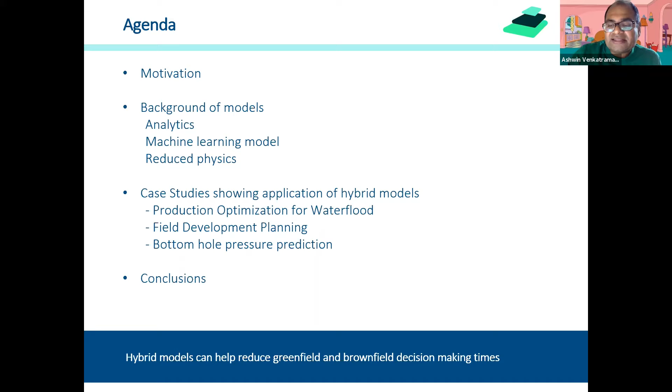And one central point that I would like to drive through the course of this talk is how the whole idea of hybrid models are formed, and how they can really be our ally, especially when it comes to trying to overcome the individual limitations associated with each of those models. All right, so let's take a step back, and for those of us who've been around long enough, do you remember how perhaps a person like Bob would be planning vacation in the 1980s?

I understand we have a mix of folks here. So for those of you who are old enough, let's say that Bob is trying to take a vacation to New York City from Austin.

These are the steps that he would typically do back then. He would start with the yellow pages, search for hotels in NYC, narrow down to a zip code, possibly start calling each hotel, check for availability, evaluate the best alternative amongst those that are available, and continue this process until he ends up reserving a specific room for himself.

Now, it's quite surprising that when you talk about Bob trying to run a reservoir simulation today, which is primarily the decision-making tool in our oil and gas industry, there are actually a lot of parallels with those steps.

So you start with learning the manual. There are umpteen keywords and framework that one needs to figure out. Perhaps by that time, you're already lost. You probably have to also select an appropriate physical model. Are you talking about a black oil simulation, or are you talking about a compositional simulation? Is it a gas condensate reservoir that you're trying to model?

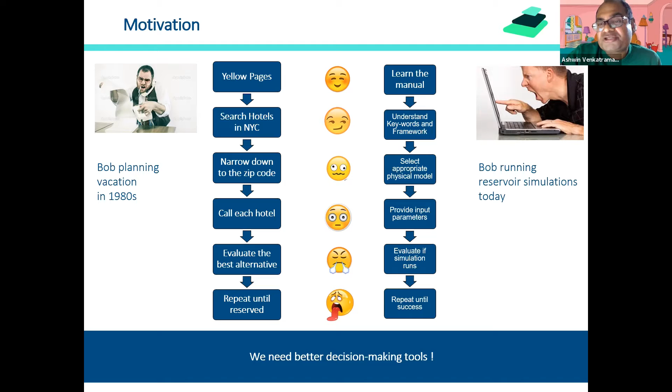So this was, I was Bob running reservoir simulations not too far back when I was with Shell, and that was really the inspiration behind starting Resermine. The whole idea that we definitely needed much better decision-making tools, which primarily can help guide decisions.

Now, that's not to say that there haven't been other tools, but I'm just trying to summarize a list of different models that are typically available when it comes to reservoir surveillance and management, along with some challenges associated with each of these different models.

So when you talk about analytics, what you're really looking at is some kind of statistical method, some cross correlations perhaps, or trying to derive some relationships where you're running them only on the data you observe, like temperature data or pressure data. And there, of course, the challenge is to identify which data set to run these relationships on.

You can talk about machine learning models, and this is something we are embracing in our industry. These typically use supervised learning, so I shall focus more on supervised learning, perhaps touch upon random forest and neural network, where you find a lot more successful applications. These are new methods, and I would want to believe that we as a community are still learning how to integrate them with existing workflows. Hopefully I'll present a couple of examples of how some of these can be incorporated.

There's another category of models called reduced physics or reduced order models. They've been around even before we started embracing simulation in a big way. These try to describe perhaps the first order physics using simplistic equations, governing background equations that might be ordinary differential equations, which means you have a neat and simplified analytical solution. So they've been around for a long time, and of course these are accepted academic techniques. People understand that they indeed help capture a lot of these first order physics.

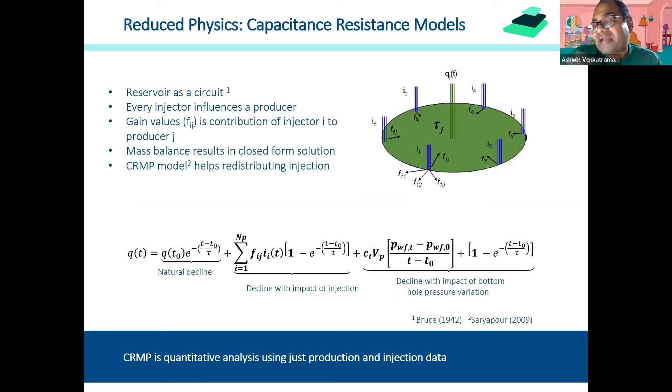Once you know these Fijs, you can go back and recast these equations to perhaps ask yourself, what should be my new injection so that I can maximize my oil production.

So I mentioned about multi-layered reservoir where you have commingled production. What we do here is essentially separate out multiple layers, which means you're adding more variables. Well, it doesn't matter, because you can use some sophisticated algorithms around it. And of course, you add an additional constraint that the total production coming out from the sum of these producers has to be constant.

And of course, you can also adapt these to steam floods, where the variation you make is to recast those equations into a two-phase flow equation, and you also have a varying tau.

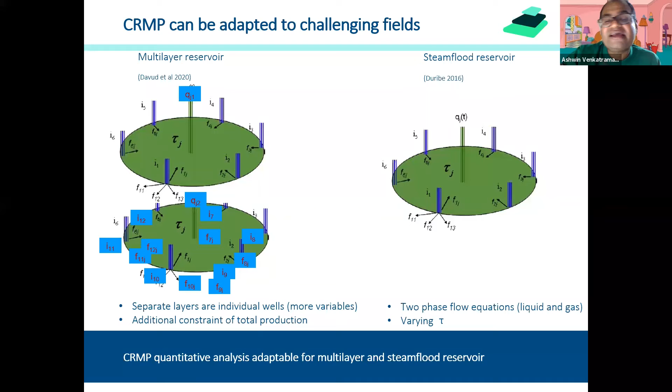So a lot of work has been done back in UT, and we've adapted and added multiple layers around that work. Essentially, this specific model can act as a quantitative analysis, because here you're talking about how much to inject from every injector.

Especially for multi-layer and steam floods, the other kind of reduced physics model we typically use is the fast march models. These rely on the pressure diffusion equation, using geological data and fluid properties to move from a permeability map to a diffusivity map, and time-of-flight calculations to determine drainage volumes around a specific location.

I will come back to some applications of these models. They're particularly relevant in field development planning, because depending on where you place the well, you can use these models to compute drainage area, which can be inputted into machine learning algorithms. Combined with reservoir simulation, they end up making much more predictive models compared to models trained on reservoir simulation alone.

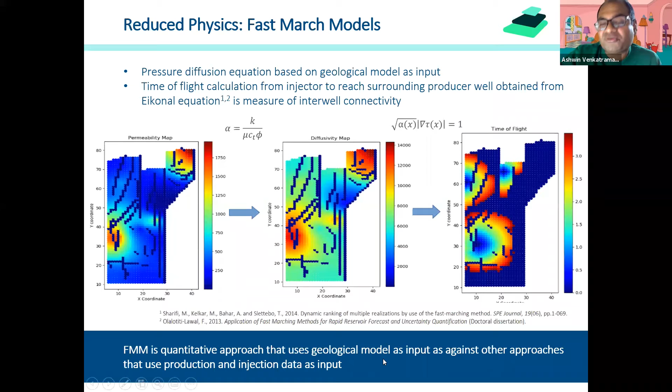So this is again a quantitative approach that uses a geological model as input, as against other approaches which typically use production and injection data as input. I just wanted to introduce some of these models, some background on how they're constructed, and some underlying equations.

So let's talk about some actual applications, especially mature field optimization. By mature field, I mean any field that has been under water flood or gas flood, where you have a lot more data in your system.

And when you have a lot more data from your reservoir, some of these methods are more powerful than a traditional reservoir simulation approach. So what you can do is essentially split into qualitative analysis and quantitative analysis.

On the qualitative side, we use analytics and machine learning, trying to broadly categorize wells into groups, identifying where your thief zones are. The kind of questions you answer with qualitative analysis include knowing which specific injector wells are effective.

On the other end of the spectrum, you can use these results and plug them back into the quantitative analysis, where you answer questions around how much injection is lost, and more importantly, which specific wells and how much water to inject in those specific reservoirs.

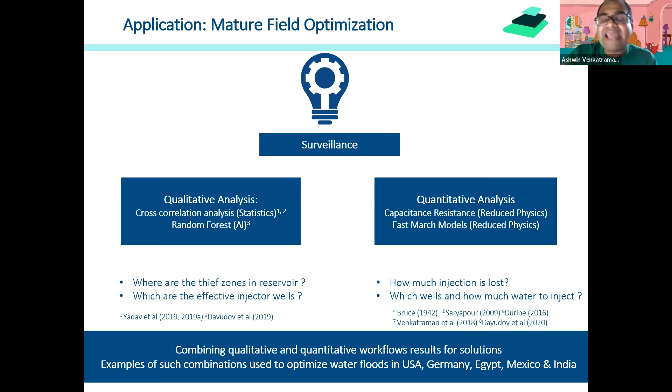The first challenge with some of these CRM models, when used as a standalone, is that especially with a large number of wells, you have too many unknowns when solving a lot of these unconstrained minimization problems. So one way of determining well pairs that are not related to each other is by use of random forest models.

The random forest model essentially helps you determine which well pairs are not related, so you can reduce the system of equations, which you can still use to go back and solve for consistent solutions.

In a certain sense, the random forest model helps you determine unconnected well pairs. You can take those off your system and use it to simplify your CRM model, which helps remove some false positives and reduce and increase the solution times associated with these CRM models. One other approach in combining these models is trying to eliminate what we often call the false positive.

Typically CRM models assume that every single well pair is related to each other. One ends up having a lot of connectivity between well pairs which are very far off from each other. So when you're in such a case, you really don't know which ones to take in, which ones to neglect. Essentially, one way of approaching this is using the fast march model, which helps you obtain a radius of investigation around every injector.

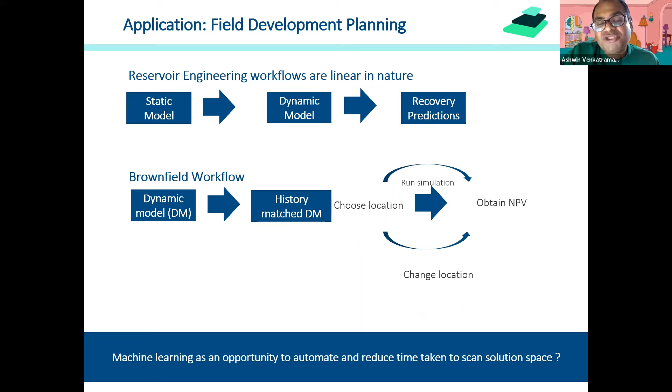So that you're not quite confident that you have scanned the entire solution space of possibilities. So the idea there was, what if we could use machine learning as an opportunity to automate and reduce the time that it takes to scan the entire solution space.

Just to present a comparison between the traditional approach where you're populating wells, you're running simulation, you're obtaining NPV, you're going back and forth. There's a sequential approach where you're making manual changes and trying to wait for simulation results. And of course it's a time-consuming exercise because you need to interact with multiple systems, setting up those simulations, especially when it comes to organizations.

The servers are in Linux, these things are in Windows. So it's really a very manual process, and also even at the end of this exercise, you're not pretty confident if the well location is indeed the optimum.

So what you can do now is essentially use a single simulation file to generate multiple cases. Through that multiple cases, generate a hybrid model, which can then be used for field analysis as well as for optimization. And I shall elaborate on how some of these techniques are done.

So the hybrid model results essentially are generated using very few simulation runs, and you combine them with fast march model results, and both of these are fed to a machine learning model, which helps you get more predictive hybrid models in that sense. So the inclusion of these Fast March models really provides some kind of an averaging of properties in order to get these predictive models for that matter.

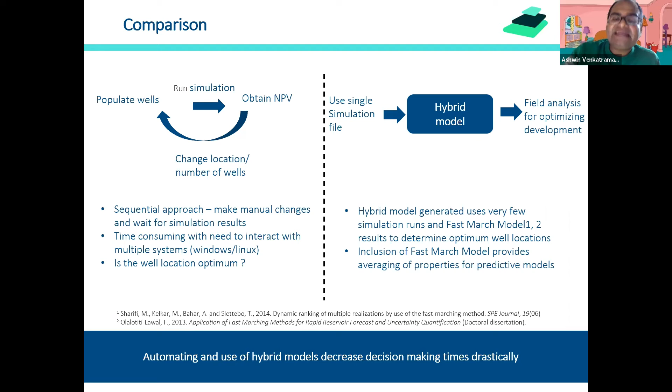So in certain sense, automating and use of these hybrid models can really decrease decision-making times drastically. Just to explain this a little deeper, so the way you're trying to generate these hybrid models is by combining a few simulation runs with Fast March.

So essentially you go from a single simulation file where you generate multiple simulation input files on the backend, and you're combining them, you're running those simulations, you're running that Fast March model for each of those new configurations, and you're combining these two to generate a hybrid model, which can then be used as a predictive model for perhaps well placement scenarios.

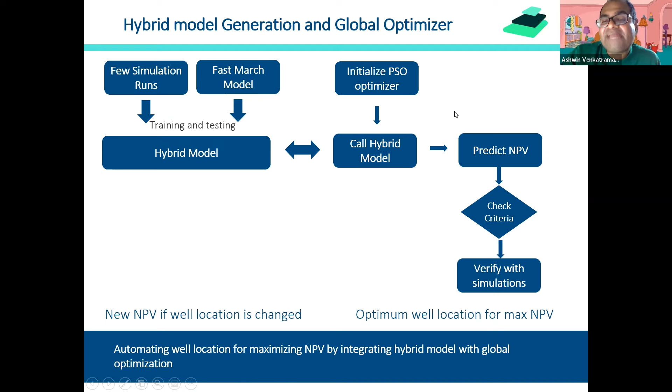Or also you can plug it with a global optimizer. So we use a particle swarm optimizer, which can help you go back and look at verifying simulations as well as predicting NPV. So just to illustrate this point, I just want to play a short video on how some of these things work.

So essentially what you can do is you can go back and just zip your entire simulation file that you might have. So for the purpose of this demonstration, I'm just using the Norne file. So let's say that you have the entire simulation file. What I mean by simulation file is all the zip contents, including all the include folders and everything.

So this is, again, we did this for an Eclipse file, but you could very well extend it to any particular simulation file that people typically use. So what it does is it first renders a browser-based rendering of your entire simulation file. So let's say that you had indicated some random locations of these 5 wells.

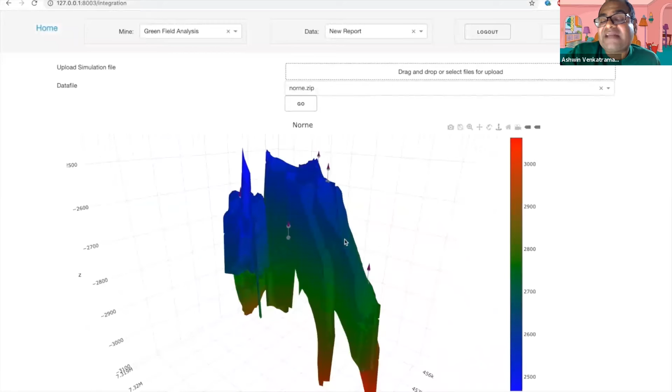So essentially what you then do is essentially now you can generate a hybrid model by perhaps specifying the number of simulations, or you could also essentially specify your target training and testing score. So in this specific case, you could also specify a target testing score. So I'm just putting in 400 simulations for now.

So you can input some kind of a capex and opex and oil price, and some interest rate depending on what organizations have. You can run and create these hybrid models.

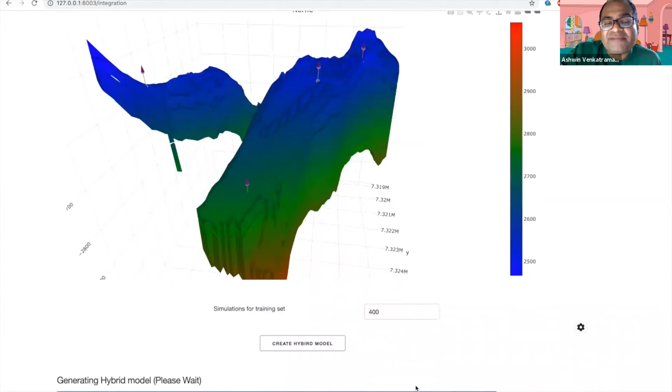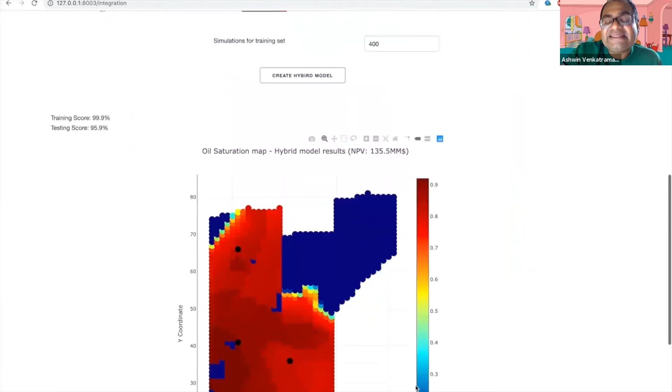So what it does in the backend is it generates 400 different variations of the well locations, and it generates new simulation input files, and those simulation input files are combined. It runs those simulations, 400 different simulations, and for each of those 400 cases, you also run these fast march models, and together they are fed into a machine learning model, which kind of helps you create these hybrid ML models that you see on your screen. And of course, these take time.

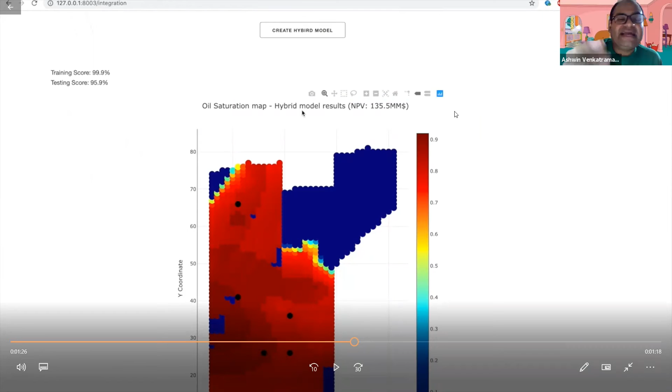I'm just showing this for a demonstration that once you have that, set it up in the evening, you come the next day. That's how a lot of our users are using it. They see this entire predictive hybrid model with the well location and the NPV.

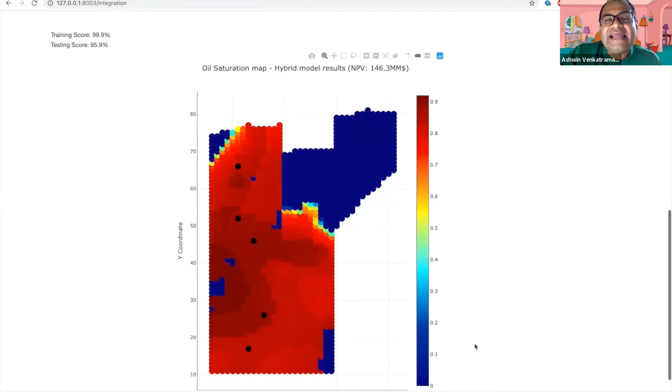Now, of course, you can move the wells around and know the new NPV, so you don't have to run a new simulation anymore because this is a predictive model in that respect. This gives you the ability to place different wells, run different scenarios by eliminating certain wells, and see if you can obtain a higher NPV.

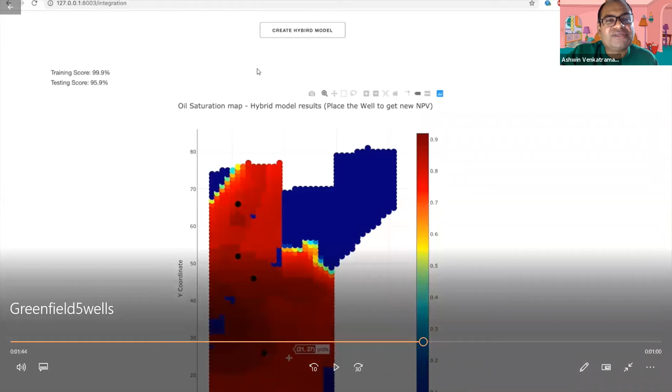You also know the training and testing score associated with this. So if you notice, once you've created a hybrid model, you know what the training and testing scores are. We've run 400 simulations for a greenfield, and you're possibly okay with a 70-80% testing score.

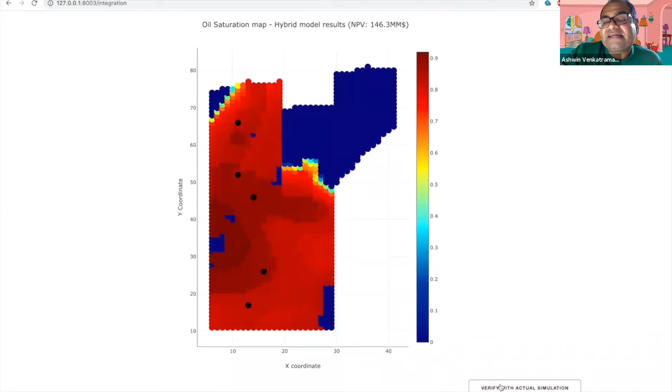So you can reduce the number of simulations you want to run. The higher the simulations, the better the testing scores associated with it. But you can also verify it with the actual simulation if you like.

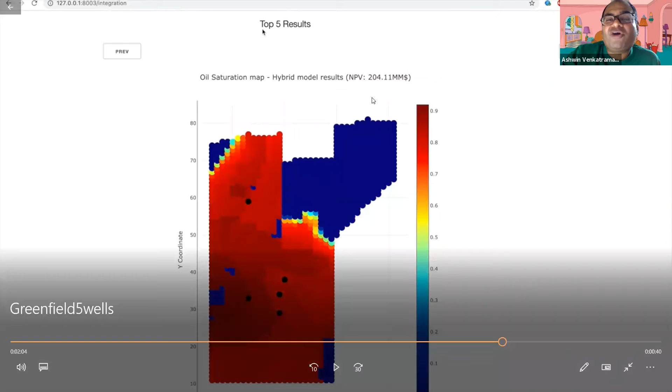But more importantly, because there can be so many different combinations, you can plug it directly to a global optimizer. In this case, we use a particle swarm optimizer, and that tells you what the new locations of these wells are for a maximum NPV. It gives you a top 5 or top 10 case for some of these NPVs.

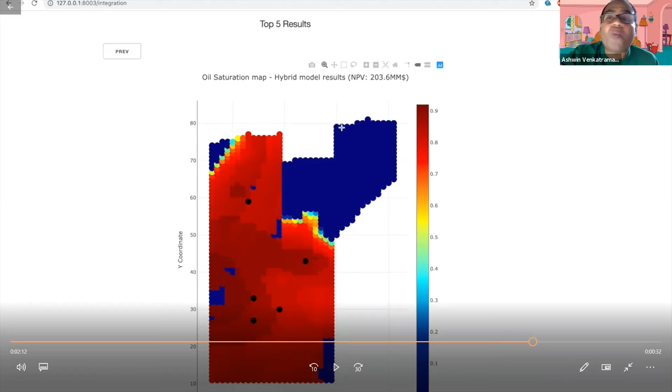I wanted to illustrate this case in point where you're going from a single simulation file to actually a decision around potential locations which can help maximize NPV. You can put things in a loop in some sense—start with 10 wells and find at what well number you can really get a maximum NPV. So in a certain sense, you're automating this entire field development planning process, starting with a single reservoir simulation file.

So just wanted to illustrate this, and we are currently deploying this for a couple of fields in Malaysia as well as the Middle East. Now, obviously, I just illustrated a case of vertical wells.

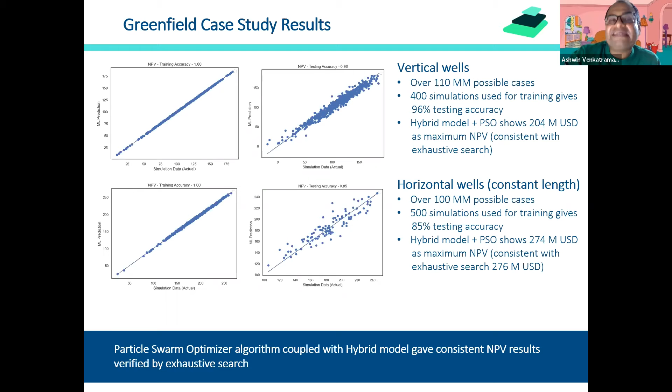So the secret here, of course, is the fast match model, which helps you generate these predictive maps. This combination of simulation, reduced physics model, and feeding that into a machine learning model—that is what creates a more predictive map for your entire field reservoir.

So in summary, once you generate these hybrid models, what you start noticing is a dramatic reduction in your decision-making times, because you've automated the entire process, and you're also confident that you've scanned the entire solution space, because you know the training scores and the testing scores—so there's much more confidence in these solutions when using these hybrid approaches.

And as I mentioned, the real aspect is the fast match model results in the backend, which really helps improve testing scores associated with the machine learning model. The fast match model helps you average out in a way that just running reservoir simulations wouldn't, especially when it comes to making these machine learning models more predictive in nature.

Of course, we've extended this approach not just to well location optimization, but also to well controls optimization, where you can integrate this in the framework to go back and say, once you've fixed the optimum well location, what pressure or drawdown should be maintained in each of these wells in order to have a maximum NPV for this specific case.

And of course, you can go back and say, okay, I'm doing it for a specific realization, but what if I have multiple realizations? So you can create multiple cases, run multiple realizations, which can also be used to rank and see which well locations are common across multiple realizations, to suggest that those should be the proposed well locations for a maximum NPV.

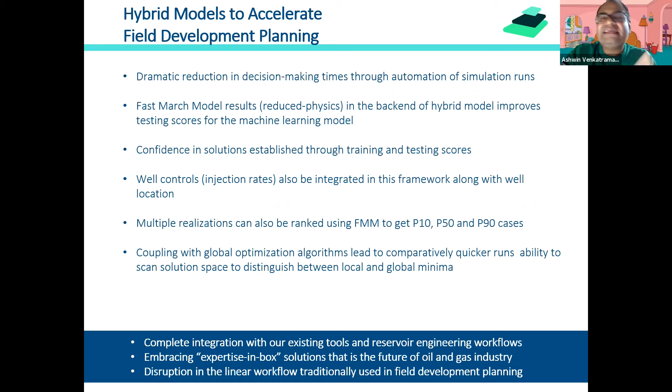So in some sense, driving a lot of those decisions that are relevant for field development planning, and that is what we are calling embracing this expertise in a box, because it goes back and identifies which model to combine, how to combine, which we believe is really the future of the oil and gas industry. And this is how a lot of these workflows are helping disrupt the traditional linear workflow that organizations are so often used to.

All right, so I do have a few minutes. So I just want to touch upon another approach that we typically do.

So this is another application where Ademide worked on this, where we are looking at predicting bottom hole pressure from the other data that you might have at the surface. So here, typically when you have these subsea wells, one of the challenges is while you might install these permanent downhole gauges, many times you tend to lose these gauges, and they're especially difficult to replace when it comes to subsea wells. So the question that we were pondering was, can other data be really collected at the surface?

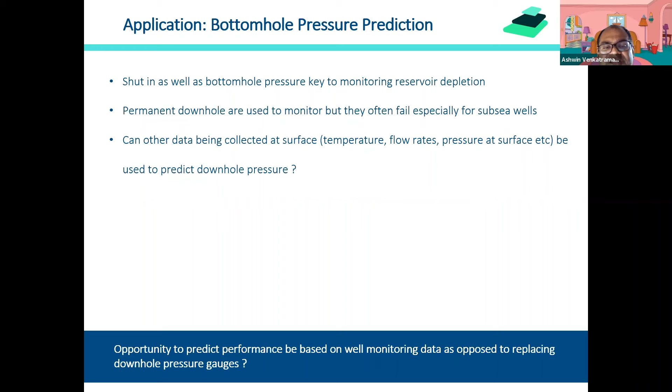The temperature, the flow rates, the pressure that we are measuring at the surface, can that be used perhaps to predict downhole pressure gauge? So can I use machine learning as a basis to perhaps use this so that if I lose my pressure gauges, can I use them as a way to predict pressure using the other data that I'm measuring at the surface?

So it turns out, one could use the LSTNet deep learning module, which is actually a combination of CNN model as well as RNN, the convolutional neural network as well as the recurrent neural network. The advantage of this combination is that the CNN helps identify some short-term local dependencies, whereas the RNN helps recognize long-term patterns.

So when you look at typical bottom hole pressure data, you have both these variations, right? So this combination helps represent the best of both worlds.

And just wanted to show a few examples of the actual data versus the prediction. So what we've done is we've used the Volve field case as an example. The blue line represents the actual data. So what you notice is there is local variation as well as long-term variations through these pulses.

And this prediction is coming from the LSTNet, where we are using temperature as an input. So essentially the temperature that we are measuring at the surface, and what you notice is some improvements obviously from what has been proposed.

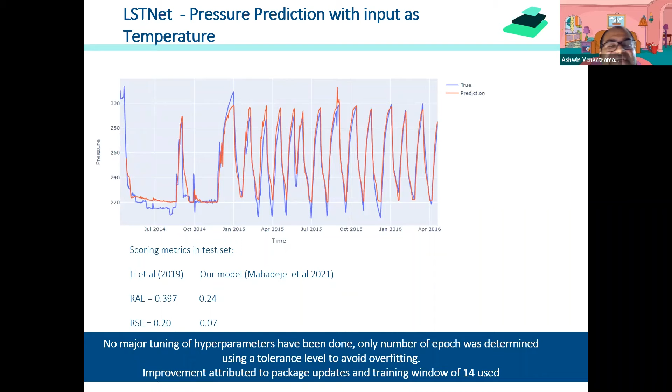But what we observe is a combination of different inputs, whether it comes to time interval, temperature, gas, typically tends to give you some really good results when it comes to a lot of these bottom hole pressure predictions. So we are actually deploying it to predict bottom hole pressures.

Of course, these modules can be integrated with GPUs. We're using GPUs for the learning part of it, and of course, they themselves can be combined with other analytical approaches. So that's the hybrid model that I was talking about. So we're using...

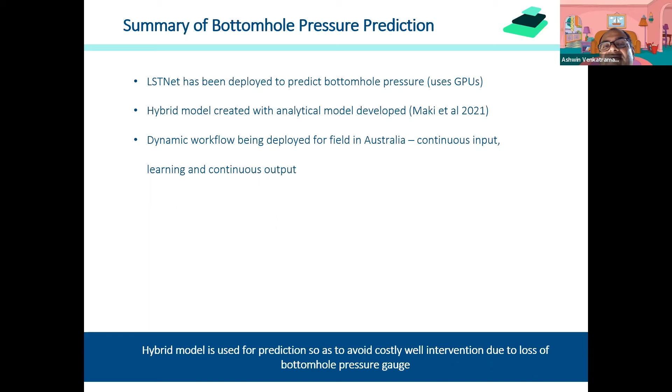LSTNet approach along with a hybrid model that has been developed, and trying to deploy that as a dynamic workflow for a field in Australia, where you have a continuous input, continuous learning. Essentially, you're getting data from the field so that you are prepared in the eventuality that some of your bottom hole pressure gauges can actually fail, and hence you're really trying to avoid this costly well intervention, which can be pretty significant when it comes to subsea wells.

So, of course, the devil is in the details. Our expertise in a lot of numerical tools really helps us embrace these hybrid approaches. I spoke about nonlinear optimization. What we've really done is adapted some of the advances in optimal control theory to make sure these unconstrained optimization problems can give you consistent solutions. We typically use penalty functions that help us convert from constrained to unconstrained problems, and that opens up a lot more ways to try to solve them.

We've also adapted some useful packages, not directly using them, but trying to see how they can be adapted within our framework to get consistent solutions. One example: one of the challenges in unconstrained optimization is typically that you don't know whether you'll get a global minima or a local minima. So what we do is use results coming from the qualitative analysis and feed that as an input to the quantitative analysis, which helps really get consistent solutions.

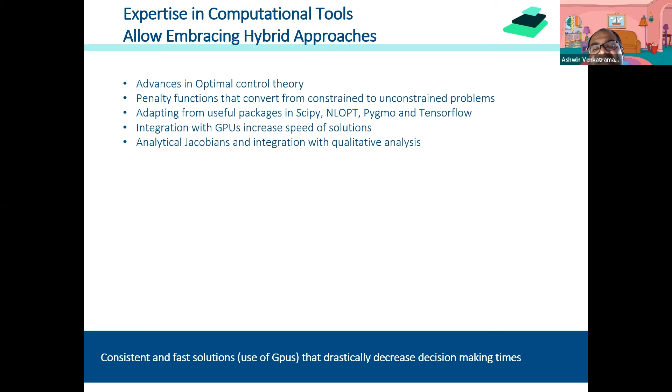The other innovation we've done is try to use GPUs, which can help really speed up a lot of solutions when it comes to 500, 600 wells. So essentially we construct some of these problems in a TensorFlow framework that can help drive much faster decision-making times associated with these hybrid models.

I just want to leave with this thought of how we are really at an important cusp in the industry. If you reflect back to the 60s and 70s, when simulation was becoming popular, I'm sure there would have been some resistance back then to use these models. But when you look around, in the last 30, 40 years, obviously they're much more pervasive.

That's become an integral part of decision making over so many years now. What I would like to argue is the 2020s are going to be the world of the hybrid model, where you will be using a combination of different models—not necessarily just simulation, but perhaps some other data-driven models, some machine learning approaches. You will be combining them in an intelligent manner. The trick, or the challenge, would be to know which particular data to use for training, and that's where a lot of domain expertise is going to play an important role.

And of course, a lot of this is also going to reflect in automation, because it's this automation which will really drastically cut a lot of these decision-making times. So in a certain sense, we believe that hybrid models in the backend will drastically reduce decision-making times, and they will really usher in a new era of reservoir engineering expertise-in-a-box solutions.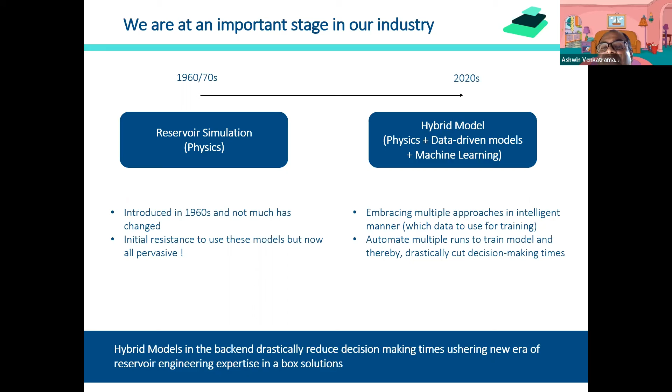So whether it's just using your data to know which specific wells to inject, how to inject—going from data to decisions—or just using a single simulation file to go directly to knowing where to place your wells and what rates to produce them, or the other application I spoke about, where you use the surface data you're measuring to go back and predict if your bottom hole pressure gauges fail, using the deep learning module, or a combination of that deep learning module with a physics-based model that we have.